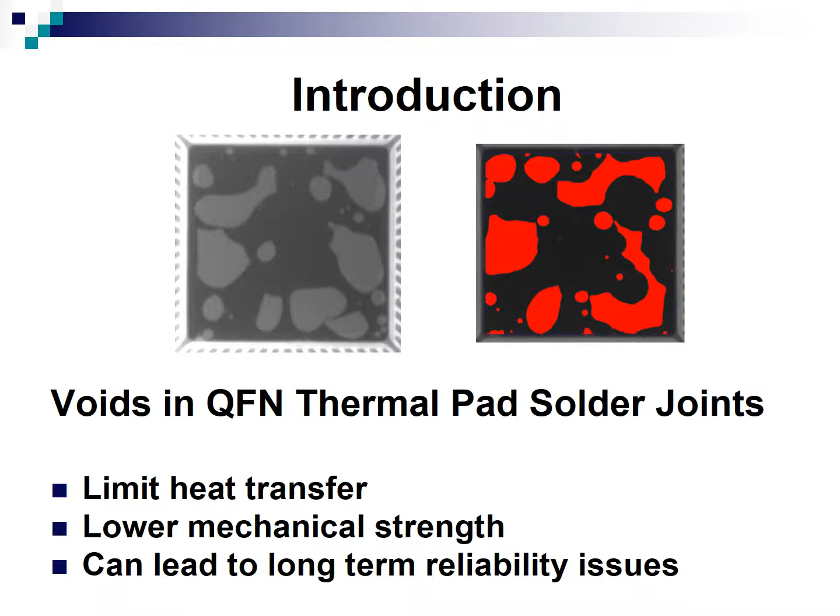Here are some of the factors that influence voiding. The print dispense process obviously plays a role. Temperature and humidity, the printed volume of the solder paste, how complete is the brick, how much air is trapped in the solder paste when you print it. Air by itself in the solder paste can lead to a void in that solder joint.

The storage conditions or environmental conditions around the solder paste while you're using it can play a big role, especially with water-soluble solder pastes. They tend to absorb moisture out of the air over time, and the longer they're sitting open on the printer, the more moisture they will absorb. Moisture directly turns into water vapor during reflow, creating voiding.

The reflow conditions play a big role. The reflow profile that you set up, the different temperatures for soaks and peaks and time above liquidus, ramp rates, all those things play a role. The atmosphere that you use in your reflow oven can also play a role. Nitrogen in the oven can actually reduce voiding for certain solder pastes, and certainly reflow with vacuum can have a big effect on voiding.

The substrates or components play a big role in voiding. Substrates meaning the circuit board and the surface finish, and the component and its surface finish and the conditions of those. The oxide level on the components and the oxide level on the circuit board finish can interfere with wetting, and if solder paste wetting is incomplete, that creates voids.

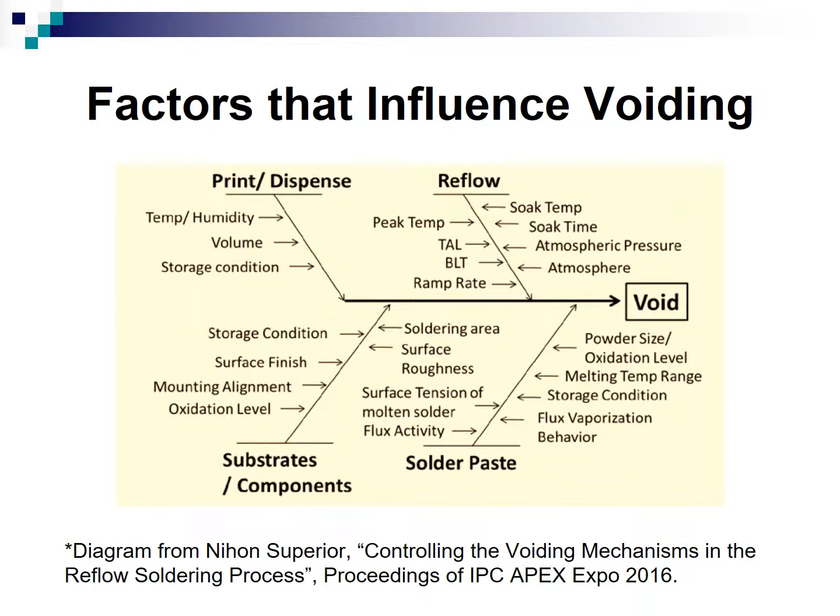And then the solder paste plays a big role in voiding. Usually people blame the solder paste for creating voids, and if you didn't have solder paste there and you were soldering with something else, voiding would probably be reduced dramatically, because the flux contributes to voiding and the lack of wetting contributes to voiding. But solder paste isn't the only factor. These other factors have to interact with the solder paste in order to optimize or minimize voiding.

Here are factors that we studied previously in our first two papers about voiding. Solder pastes, we studied a wide array of solder pastes. Solder powder types, we were looking at different particle sizes, type 3 versus type 4 and type 5, to see what effect that had on voids. We did some different stencil design considerations on these thermal pads. You can see here we studied a regular window pane. We studied a 5-dot pattern. We took a look at a rotated window pane and then just a diagonal stripe pattern, and that's published in our previous papers.

We also studied two different surface finishes and their effects on voiding, ENIG and OSP surface finish. And then we optimized the reflow profile and did some different things with the reflow profile to see what effect it would have on different solder pastes in terms of voiding. We also used nitrogen in reflow for a test. Like I said earlier, nitrogen definitely reduced voiding for one type of solder paste, but had very little effect on other solder pastes.

And then vapor phase with vacuum was also tested in order to determine the effects of vacuum on voiding in solder joints. And anytime you can pull a vacuum during reflow, whether it's convection or vapor phase, vacuum will dramatically reduce voiding, regardless of these other factors. But these systems can be quite expensive, and while they are commonly available, not many of our customers use these types of systems.

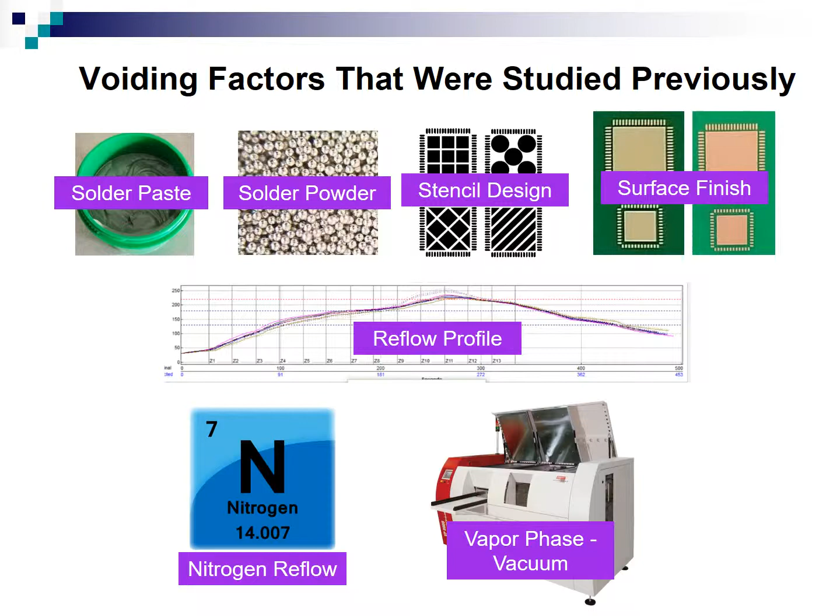So in this presentation, these are the voiding factors that we're studying. Solder powder size: we're again taking a look at type 3 versus type 4 and type 5 solder powders. In terms of solder pastes, we have two different water-soluble lead-frees, solder paste B and solder paste E. And then we have two different no-clean lead-frees, solder paste C and solder paste F, which is a new low-voiding no-clean lead-free. We gave letter codes to these solder pastes, and they seem like they're out of order. Well, these letter codes were used in prior papers, so I wanted to be consistent. For every fill the void paper, we use the same letter codes for the same type of paste, so it's consistent throughout all of our data.

In terms of solder alloy, we've never studied different alloys besides SAC 305. SAC 305 was the main alloy we've used in the past. So SAC 305 was included again as a baseline in this paper, but we've also added 3 different alloys. You've got SN100C alloy, which is a tin, copper, nickel, germanium alloy. SN100CV, which is a relative of C: it's tin, copper, nickel plus bismuth. And then we have what we call an AT mixture, which is a mixture of 90% SAC 305 and 10% SN100C. The resulting solder joint would have this composition. This particular mixture was designed to widen out the temperature range of melting and freezing, so that the gases have more time to escape in order to minimize voiding.

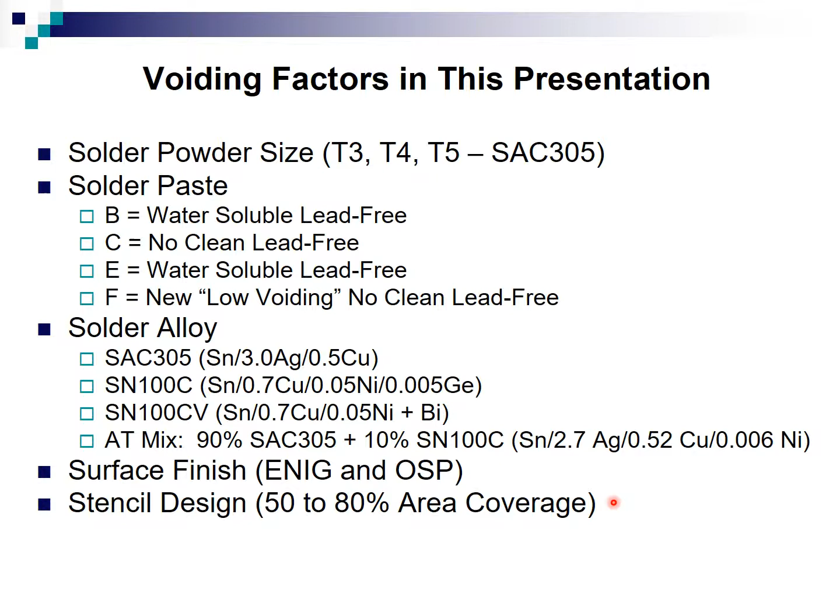Here's our experimental methodology. This is the circuit board that we used. We call this a PR test board. It has 2 sizes of QFNs that we use for voiding measurements. L1 through L4 is the large QFN. It's a 10 millimeter body, 68 lead. The thermal pad's about 8.3 millimeters in size. Then we have a smaller QFN, a QFN7, which is at locations S1 through S4. That has 48 leads, and it's got a 4.9 millimeter thermal pad. Both of these QFNs have a matte tin surface finish.

In most of our testing, we took 80 void measurements. So we ran 20 boards per variation times 4 measurements on 1 component size for each data set. So each data set has about 80 void measurements in it.

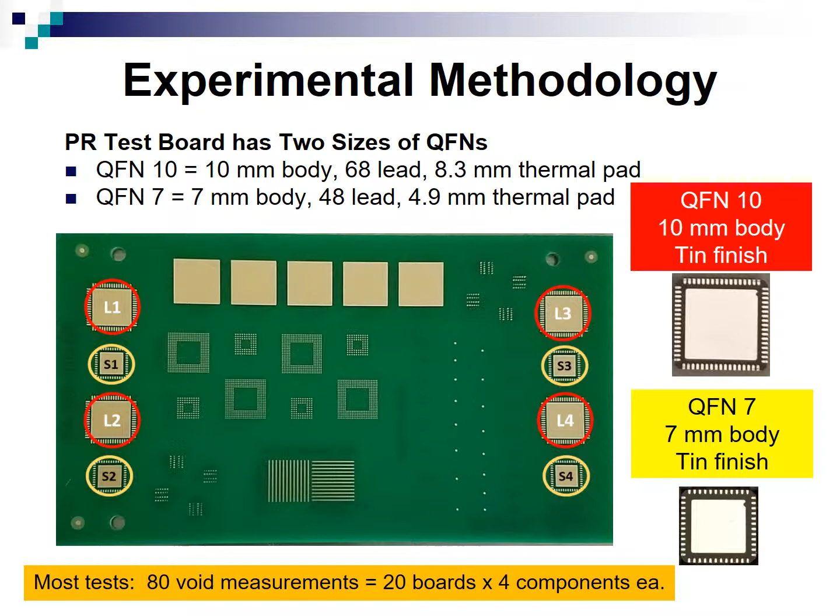Here are the 4 different solder pastes that we're using and some more detail on these. The 2 water solubles are B and E, and they're shown at the top. Solder paste B was chosen because it has relatively high voiding in this testing. Solder paste E has relatively low voiding as compared to B, just for a comparison. Both of those are classified as ORH1 solder pastes, so they're very high activity halide-containing solder pastes. Solder paste C and F are our no-cleans in this experiment. C is fairly low voiding, typically speaking, and F is considered ultra low voiding as compared to C. Both of these are classified as ROL0 solder pastes.

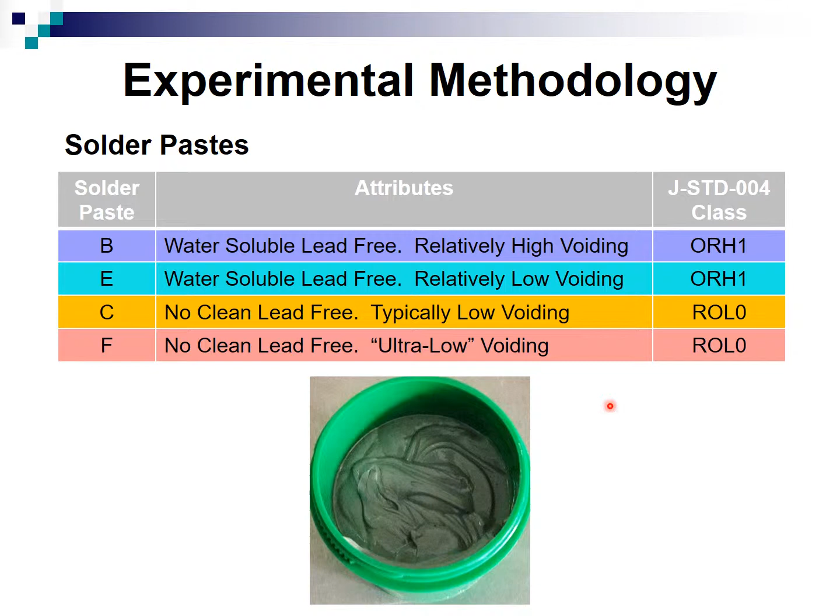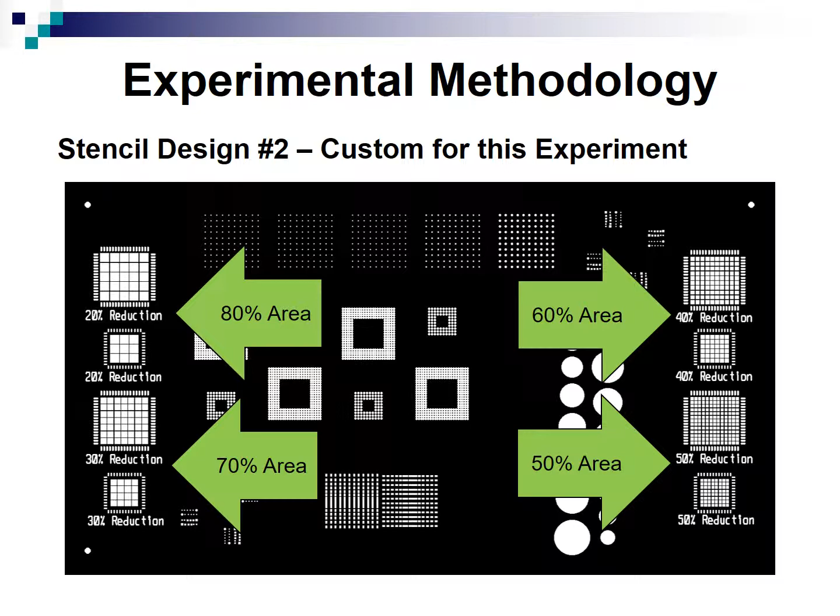We did make one experiment where we used a different stencil design. And this stencil design, the intention was to study what the effect is of area of coverage on voiding. So we varied the area of coverage from 80% area of coverage here in the upper left to 70% area of coverage of solder paste, 60 and down to 50% area of coverage. And you can see the number of bricks in the window panes change a little bit from one design to the next.

So when I get to the data chart that I show this data, I will call out that this custom stencil design was used for that data set. Otherwise, stencil design number 1 was used for all these experiments.

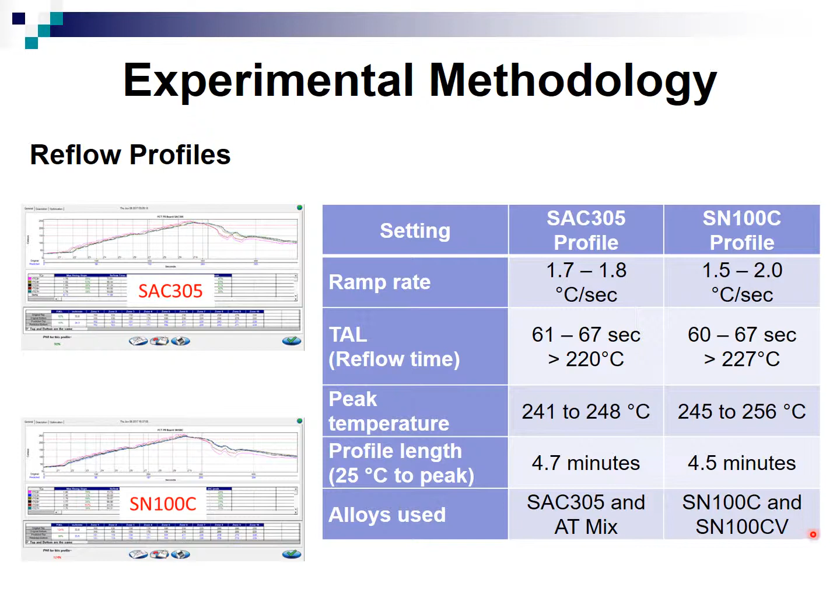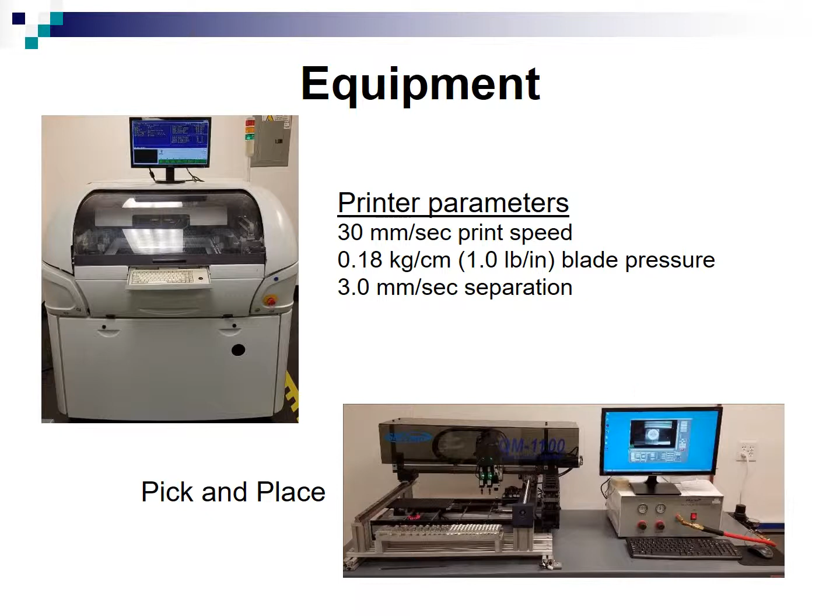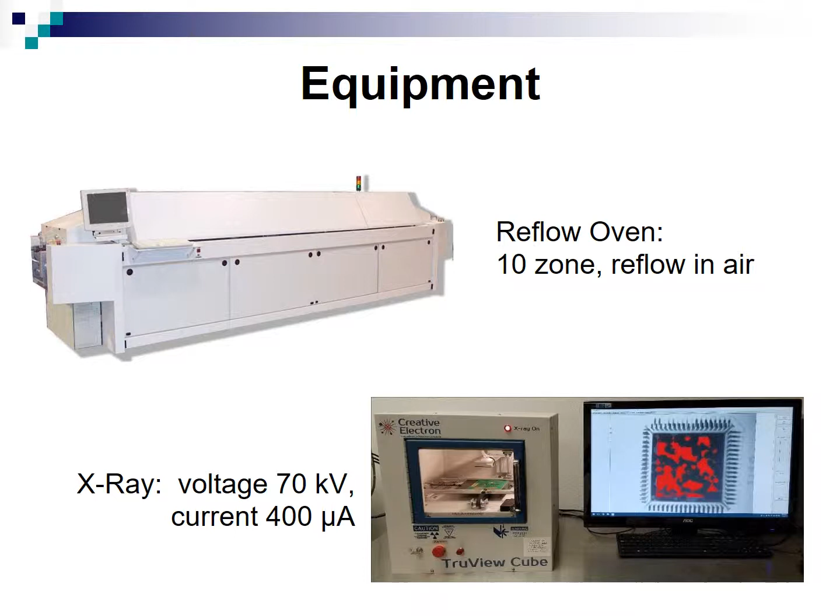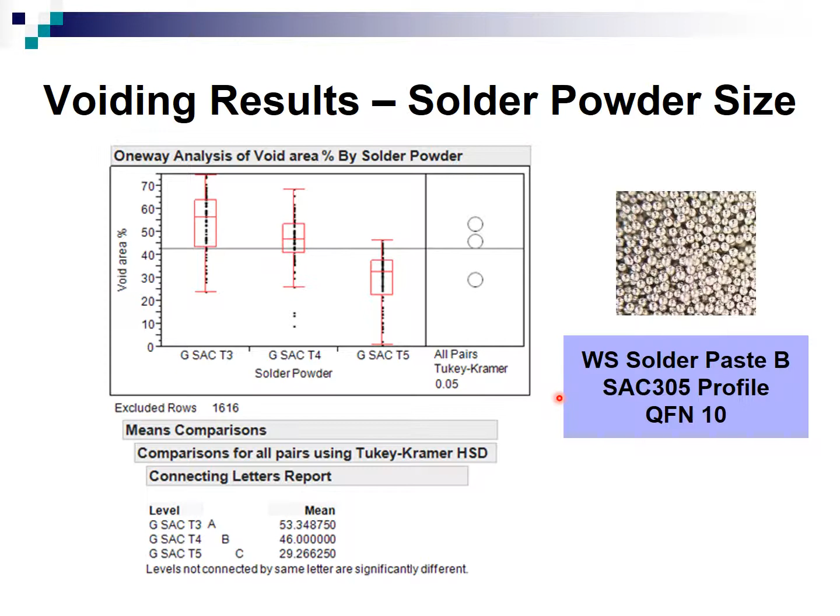The mean values are 53% void area to 46% void area to 29% void area. So for this particular solder paste, switching to a smaller particle size of solder powder has a dramatic effect on voiding. It reduces voiding.

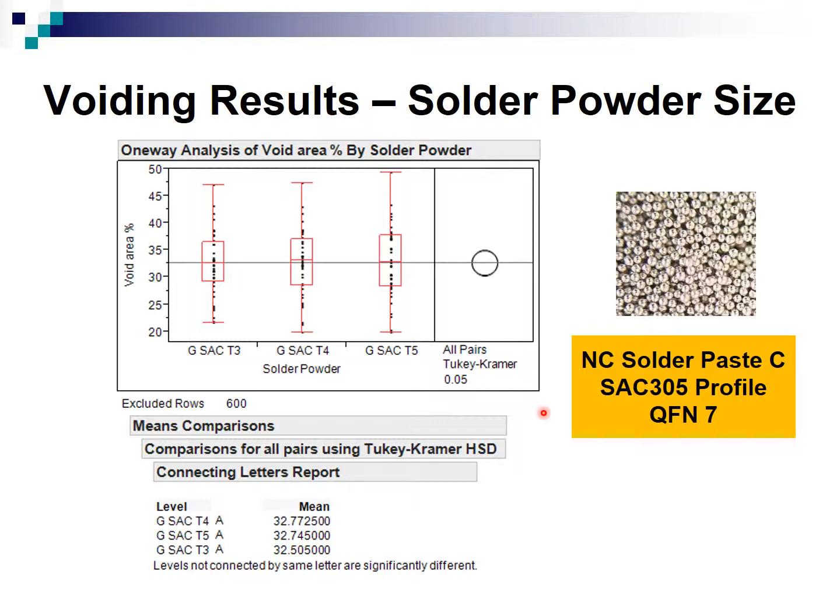And intuitively we know that because you can look at the mean values, 32% for each one of these three data sets. So switching solder powder size does not have an effect on voiding for solder paste C.

So what we can say is solder paste F is very similar to solder paste C in terms of how voiding is affected when you switch solder powder particle sizes. It doesn't have an effect on solder paste F and C, but it did have a big effect on the water soluble solder paste B.

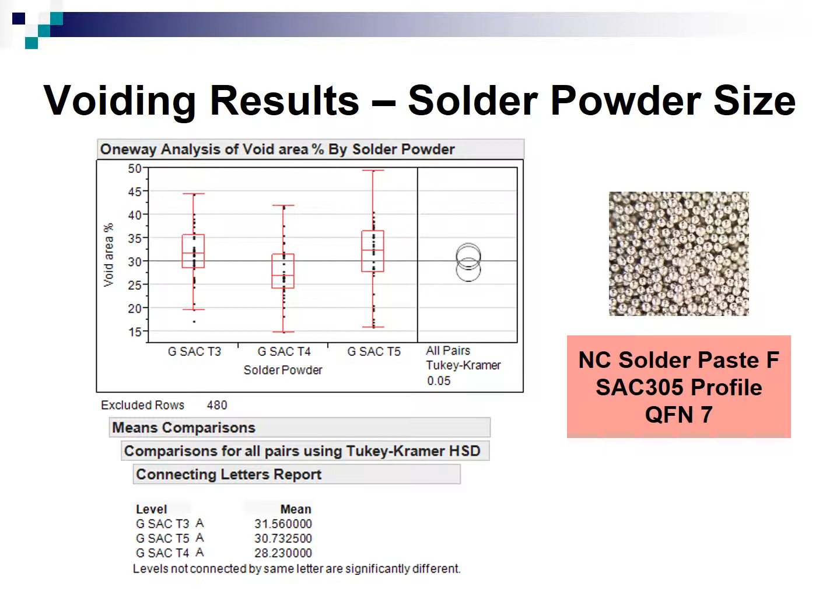And this seems to be corresponding to melting point or melting range. SN100C has a singular melting point at 227 C, whereas the melting range for SAC is about 3 degrees, the melting range for the AT mixture is about 10 degrees, and CV has about a 5-degree melting range. So the wider melting ranges seem to have lower voiding than the single eutectic alloy.

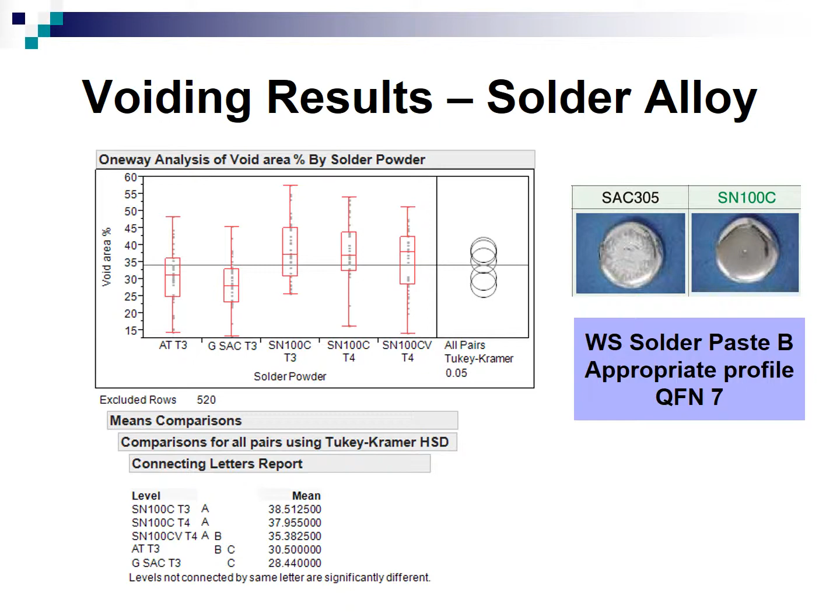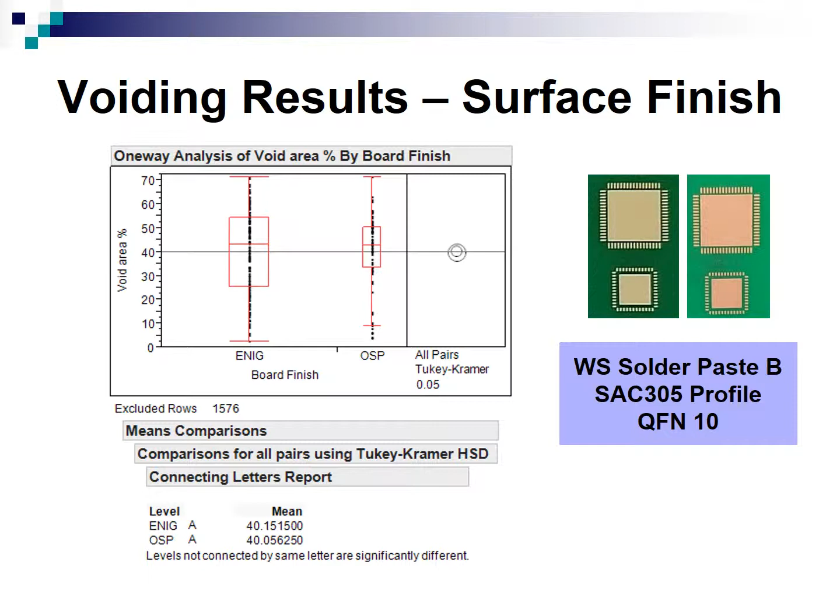Here are the voiding results for surface finish. This is ENIG versus OSP. These were run with water-soluble solder paste B and the SAC 305 profile and on the QFN 10mm size. You can see these two data sets look almost identical. The circles are concentric and the letter codes are the same. And these mean levels are identical, 40% mean void area for both ENIG and OSP with this particular solder paste. This particular solder paste is highly active and it seems to wet and spread equally as well on both of these surface finishes.

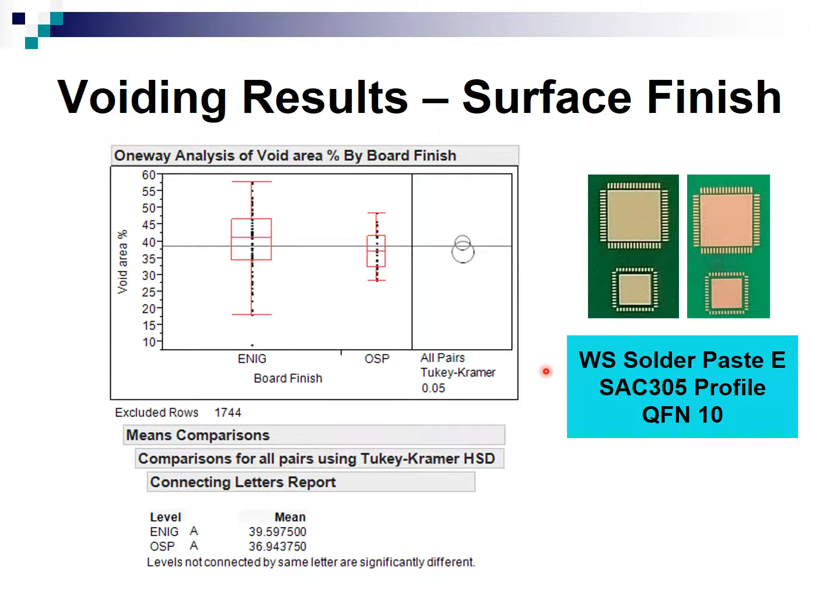Here's the same data repeated for water-soluble solder paste E. This is also a high-activity water-soluble solder paste, and you can see the voiding levels look very similar here for ENIG and OSP. The mean values are 39 and 37%, and the letter codes are the same. So there is no difference in voiding behavior for this solder paste on these two surface finishes.

Here's the same test repeated for no clean solder paste C. Again, we're looking at the difference between ENIG and OSP surface finish. You can see ENIG voiding is much lower than OSP voiding. The means are 9.2% versus 1.4% for ENIG. So for no clean solder paste C, it doesn't wet and spread as well on OSP surface finish as it does on ENIG. So that creates higher voiding from this particular solder paste when you change surface finish. But the same was not true for the water-soluble solder pastes. The water-soluble lead-frees had identical voiding for both of these surface finishes.

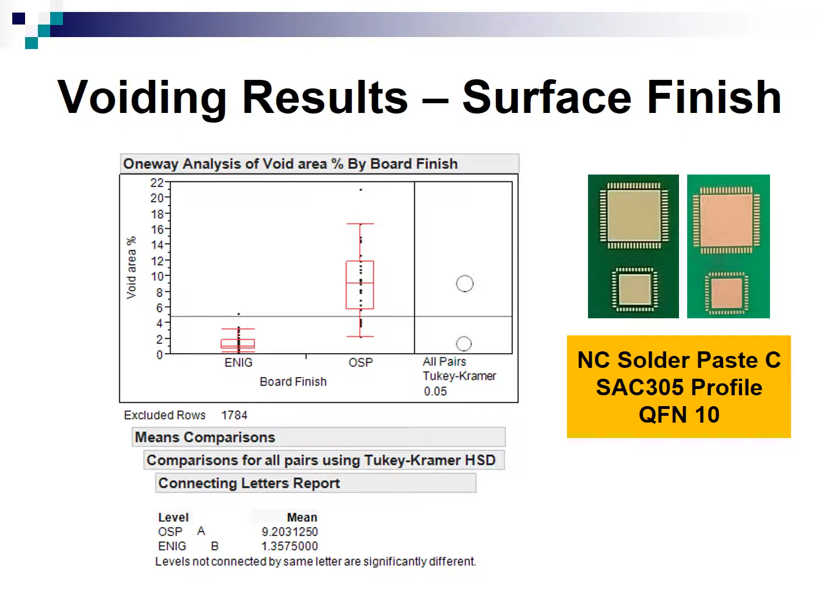Here are the voiding results for two of the solder pastes that we tested. I just chose these two for a quick comparison. These are no clean solder paste C and F, run with a SAC 305 profile and QFNs 7. Solder paste C has significantly higher voiding than solder paste F. You can see the mean values are 32 versus 25%. The letter codes are different, so this is statistically significant. So we can show that solder paste F, which is a low voiding solder paste, does generate lower voiding than solder paste C.

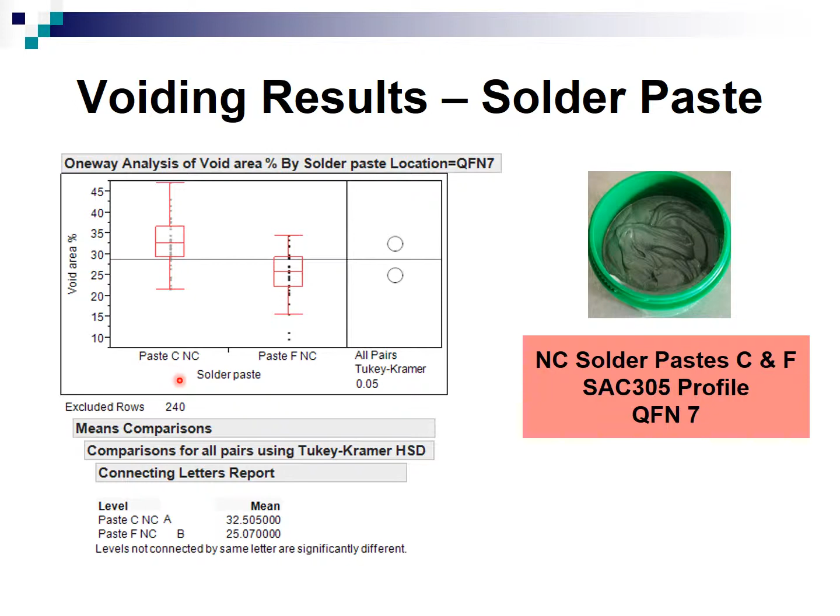These are the voiding results for the custom stencil design. So in this case, we varied the area of coverage from 80 down to 50% area of coverage, and we used no clean solder paste F and the QFN 7. You can see two different levels of voiding here. 50 and 60% area of coverage had significantly higher voiding than 70 and 80% area of coverage. You can see the mean values down here are quite different. 28 to 30% void area for the lower area of coverages to 6 and 7% void area for the higher area of coverages. So you can see here that just by increasing the amount of solder paste you print onto the thermal pad, you can significantly affect voiding.

And that's largely due to the amount of wetting or spread that the paste can do underneath that component body. If you have too little solder paste, voiding goes up. And some of those voids are just due to incomplete flow of solder paste underneath the component. And then if you put on more solder paste, voiding goes down. But I will say this, that in the 80% area of coverage, we did have some component float and skew, which caused lack of connection on some of the perimeter pads. So 80% solder paste area is probably too high for these components. 70%, maybe 65% would be an optimal number of solder paste coverage to get the proper orientation of the component and also to minimize voiding.

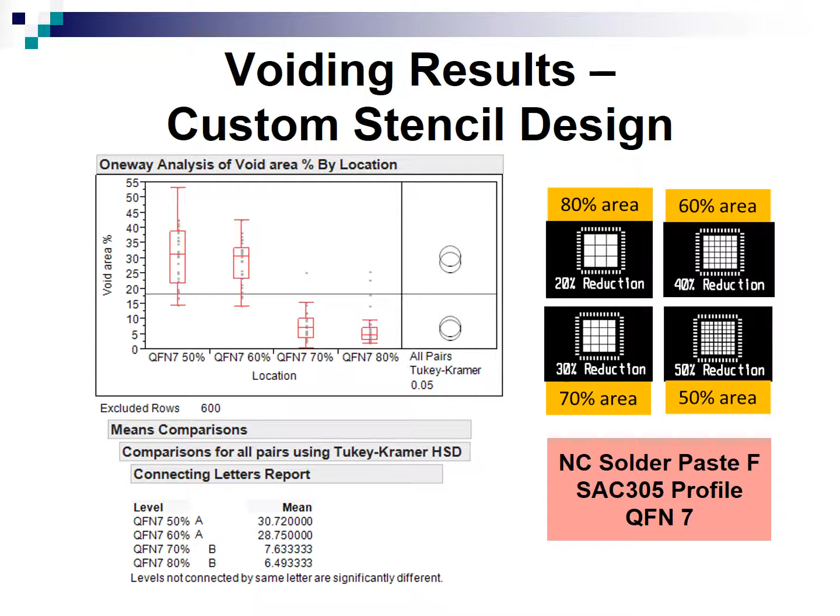So here's our conclusion, or a summary of the data. So in conclusion, what have we learned about voiding? The component size has an effect on voiding. The smaller QFN gave higher voiding than the larger QFN that we tested, but this was likely impacted by the stencil design that we chose for the standard stencil. The standard stencil had 50% area of coverage for the small QFN and 65% area coverage for the large QFN. And that probably had a bigger impact on voiding than the two different sizes of components. This is something that I'm looking at studying a little more in the future. I'm going to design some stencils where we have the exact same area of coverage and run both component types, and we will see what types of voiding levels we get.

Solder powder size had an impact on voiding as well. Decreasing the solder powder size gave lower voiding for water-soluble paste B, but it did not have any effect for the no clean solder paste C and F. Solder paste by itself has a big impact on voiding. Water-soluble lead-free pastes tend to give much higher voiding levels than no clean lead-frees. And there are also new low voiding solder pastes available that can help to reduce the potential for voiding.

Solder alloy had an impact on voiding. The melting range of the solder alloy seems to have an effect. As it widens, voiding levels seem to go down, but that's not the only factor with solder alloy. The surface tension of the solder alloy might play a role; how well it wets and spreads on the metal surfaces of the component and the board might play a role. So there are other factors to think about when you're looking at different solder alloys.

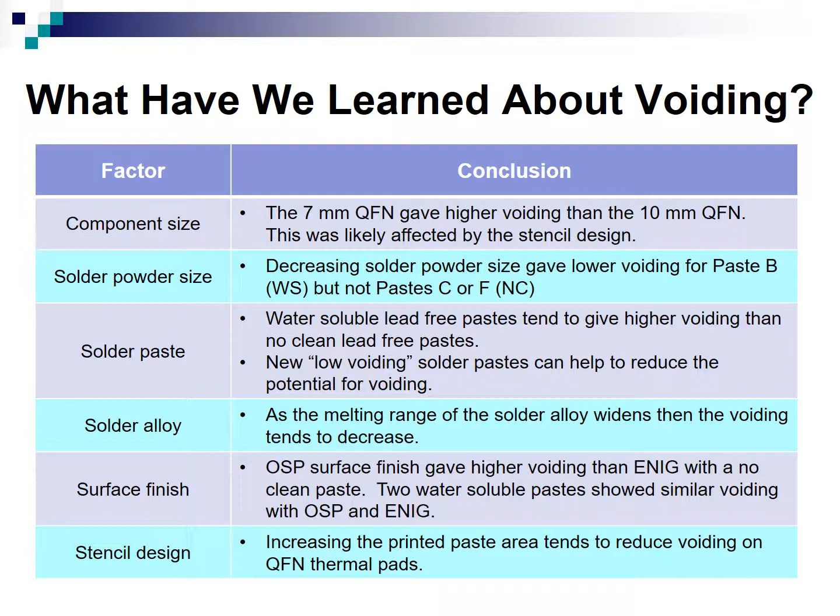Surface finish had an effect. With no-clean solder paste, OSP gave much higher voiding than ENIG. But two different water-soluble solder pastes showed very similar voiding levels with OSP or ENIG. And then the stencil design had a big impact on voiding. Increasing the printed paste area tended to reduce the potential for voiding on these QFN thermal pads.

So here are some recommendations on how to fill the void. Decreasing the solder powder size can reduce voiding with certain solder pastes. So if you have the ability to change your solder powder particle size, it might have an impact on voiding. If you also have the ability to change solder alloy, changing solder alloy might help to mitigate voiding. But that's not true for every solder paste. The alloy and the solder powder particle size have to work with the paste that you're using.

We recommend using a solder paste that works well and wets well on all the surface finishes that you're using, or change the surface finish. If you can use a surface finish that's easier to wet, then that's going to minimize the potential for voiding. Lower voiding solder pastes are available and can be used to reduce the overall potential for voiding, but I will say that with a caveat that solder paste is not the only factor here. There are lots of other things that affect voiding, as we've shown in this data.

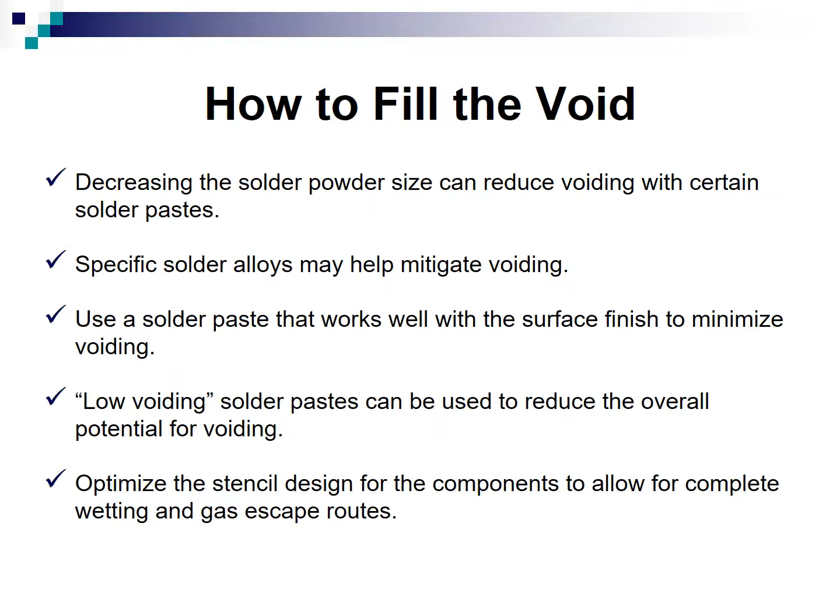And then we recommend that you optimize the stencil design to allow for complete wetting and add gas escape routes to allow voids to escape from underneath, especially these low standoff leadless components.

Here's a list of the future work that we're planning on testing. We are going to take a look at voiding for via-in-pad designs. Via-in-pad is quite a common circuit board design for QFNs especially, and we are testing a couple different ways of mitigating voiding for this type of design. We're looking at via hole plugging options. So as a baseline, we're going to run some via-in-pad designs without any plugging, just to see what type of voiding level we get.

And then we're going to try to do a solder mask tent on the back side of the circuit board, or the non-soldering side, and see what effect that has. Solder mask tenting tends to put a thin layer over one side of the hole, but the rest of the hole is open. So there's going to be air or maybe process residues in that via hole that could potentially escape up into the solder joint and create a void. Solder paste can still potentially flow down in until it hits the solder mask tent on the bottom side. So we'll see what effect that has.

And then we'll do a complete via fill process as well, and the popular theory is that the complete via fill will reduce voiding completely. But we're going to test it. We're going to see what effect that has.

And then in terms of stencil design, we're going to try our solder paste print around the holes, and we're going to add some gas escape routes to try to optimize that stencil design so that solder paste can't flow down into the via very easily, and that any gases that might come out of the via can escape from underneath that component body. And then we'll compare that stencil design to a standard stencil design where we print window panes directly over the via holes, ignoring the via holes completely as if they weren't there, and we'll see what effect that has on voiding.